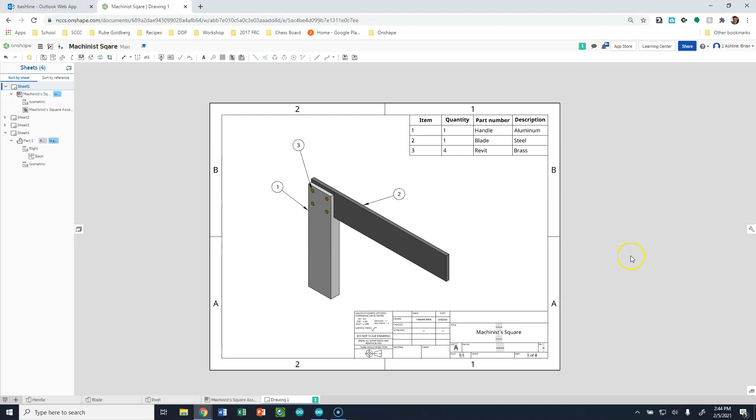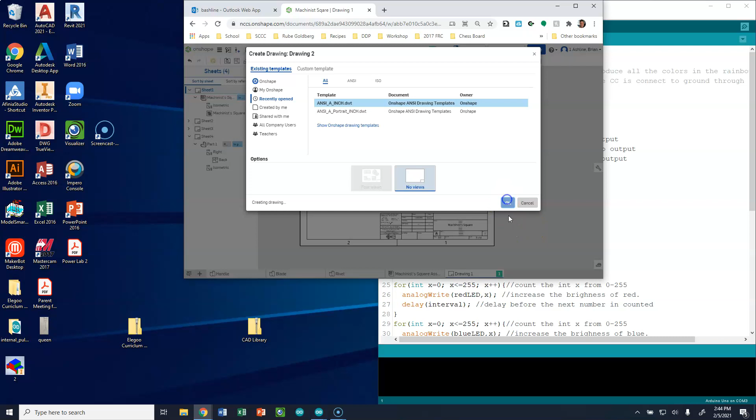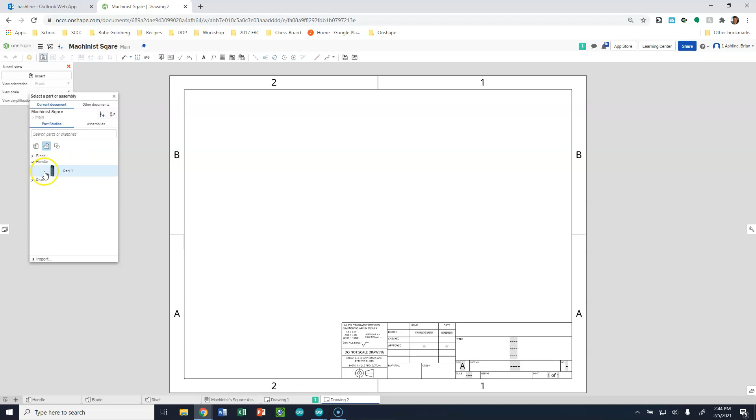Okay, so let's just work on the handle really quick. I want to show you again just a few things, and then we're going to go from there. So I'm going to bring my handle in. On my drawing, I have my handle set as 1-to-1, so that's what you guys should have it set as also.

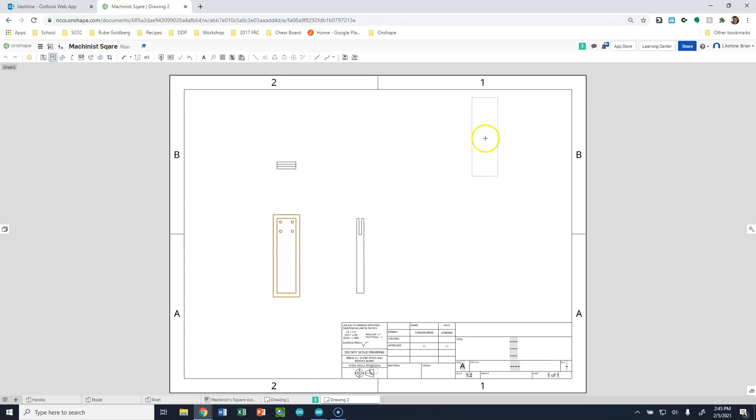So I can project that up, I can project that over, and I can project that to the side. Okay, and I don't know what happened to my 1-to-1, so I'm going to go through and edit this, change it back to 1-to-1, and boom, everything is kind of updated.

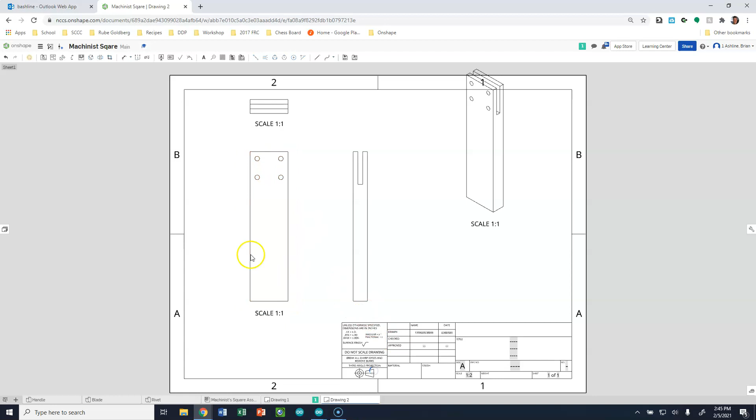And again, we don't really want these scales everywhere. Unless the scale changes, the scale should only be there once. Why does it repeat this multiple times? So let's get rid of all of that.

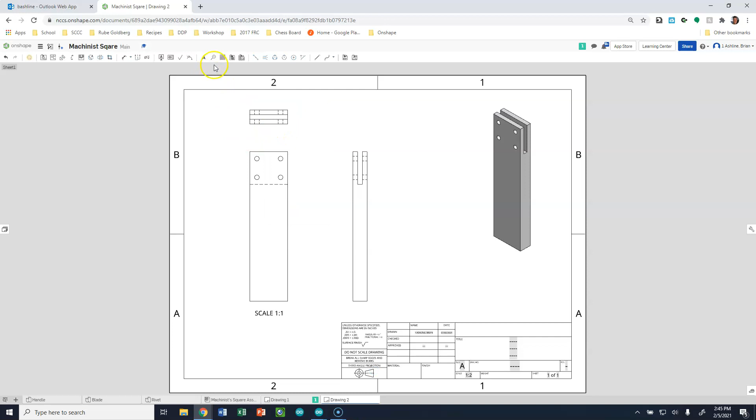So again, this is going to be shaded. Okay, and then we got to turn on hidden lines, which again you guys know how to do all this stuff. We're going to right click, show hidden lines, right click, show hidden lines, right click, show hidden lines. You guys need to go through putting in your center marks and your center lines.

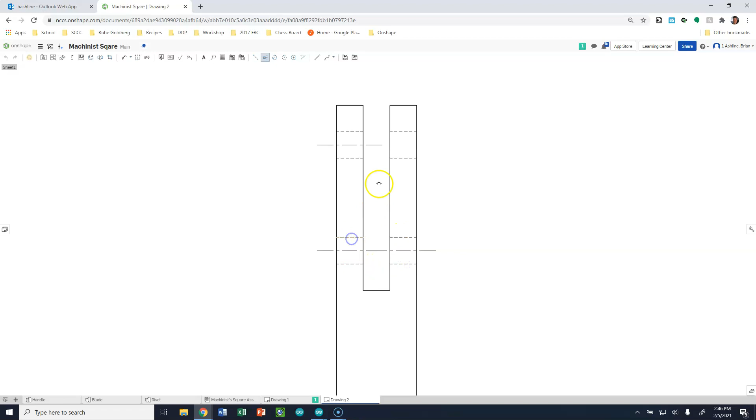All right, so again, that's all stuff that you guys know. We need to change the scale. This is actually a 1-to-1 drawing now, 1-to-1, and we're going to set up the title of this thing as the handle.

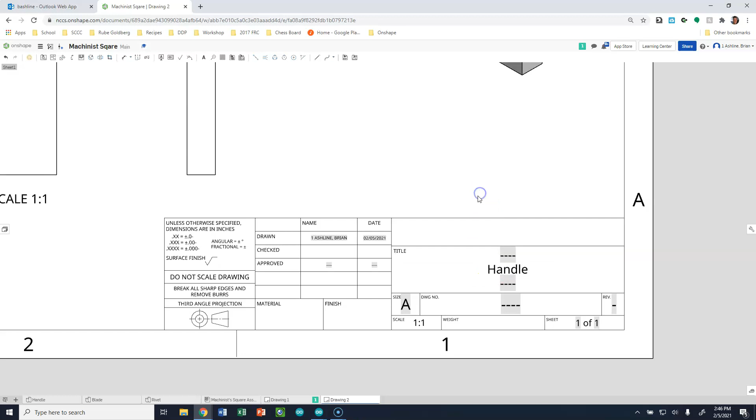Okay, so the one thing that I really needed to show you that's new is changing your dimension style. So right now our dimension style is in decimal points. And for this particular drawing, everything is labeled in fractions. So in order to change to fractions, what we need to do is click on this little drawing properties icon on the right of our screen.

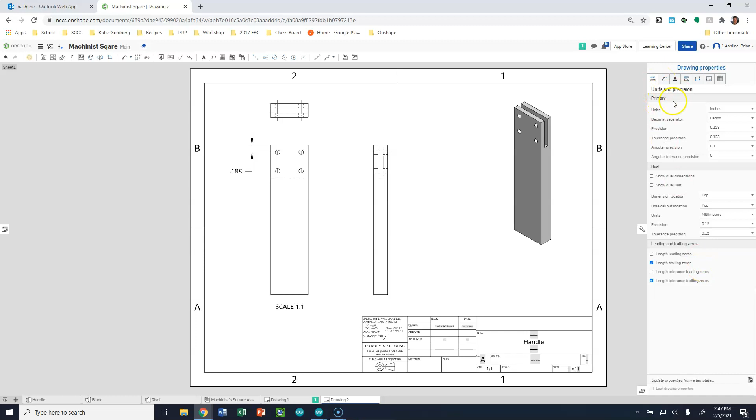And so a couple things are going to be within here. Underneath primary stuff, we have our units. Okay, we don't want just inches to be selected. We want inches fractional to be selected. Notice now that that's changed my number to a fraction.

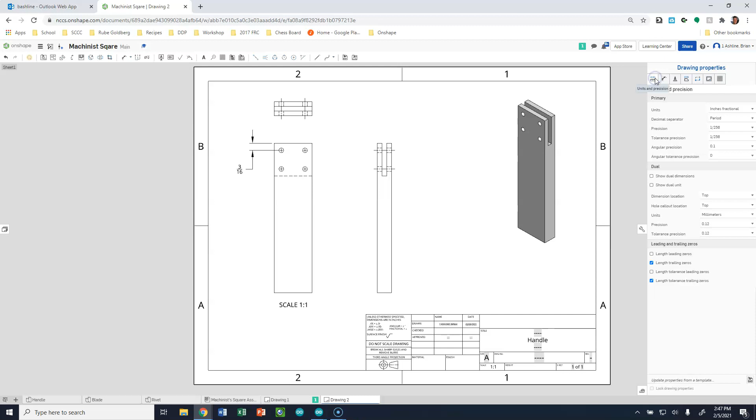All right, you might also, one thing I did too is under the dimension side, I changed my text height from being 0.12 to being 0.1. Just makes it a little bit smaller and easier to fit into things.

Yeah, I'm pretty sure that's it, right? So I went through, and again, you can kind of follow along with my drawing for right now. Dimensioned up all my pieces, got things looking good, and you got to go through those steps.

All right, but now we're going to create 2 more sheets within this drawing set, which is different than just creating 2 more drawings at the bottom tab. So over here we have sheets. This is the sheets within our drawing set. If we click this button up here, insert sheet, we can have a whole new sheet within our set.

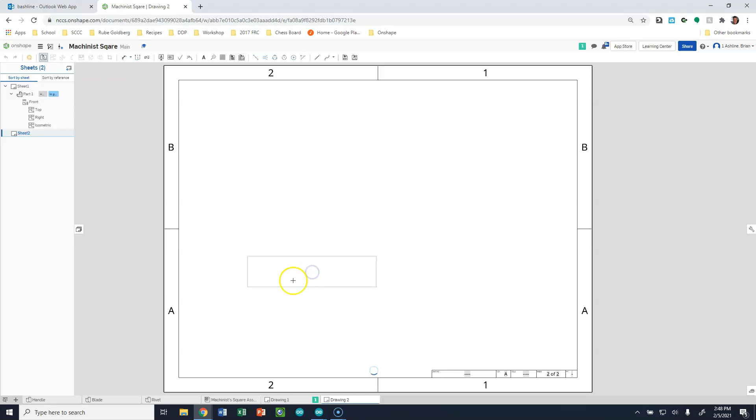And then we can go through and we can load our blade, for instance, right? And we can start putting our blade in this drawing, and we'd go through that process. And then we would create, once that's done, a new sheet, and this would be our rivet, and we would create a rivet, and then that would output that.

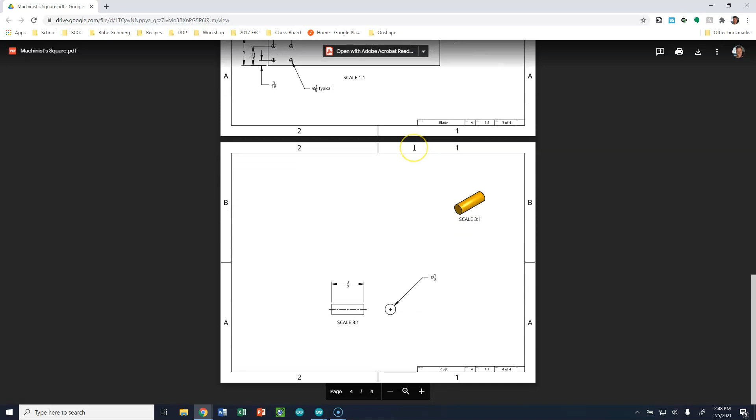And then the nice thing about this is when you go to print this, instead of it being like 3 individual PDFs, now it's just one PDF like this, okay, where it has 4 sheets, or in your case, it's going to have 3. So again, for right now, you guys are in charge of drawing these 3 objects and then dimensioning these 3 objects.

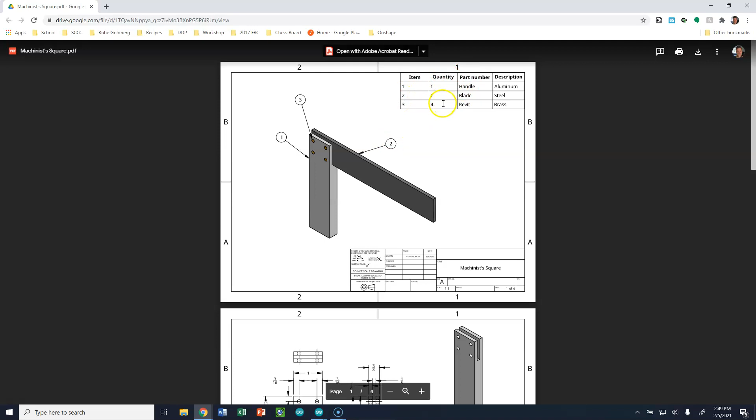Tomorrow or the next day, we're going to go over the video of how to assemble the objects, how to add things like names and descriptions to them, how to create this cover sheet with an isometric view of our drawing, and what are called part balloons, and then a bill of materials, or BOM, in the top right corner. So again, this one's still coming up, but you guys have all of the tools necessary at this point to be able to edit this stuff.

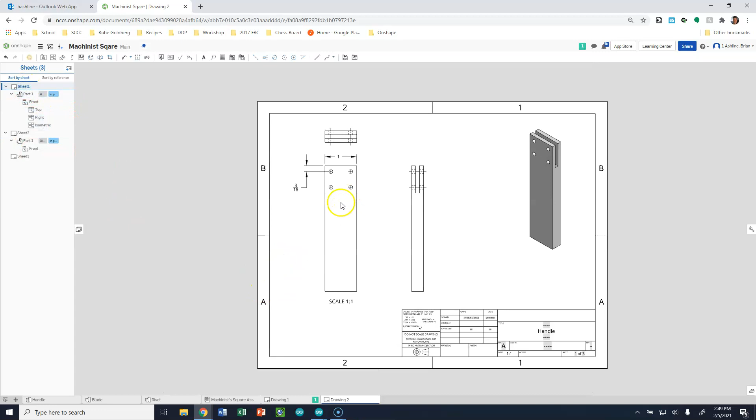I guess except for one, we did talk about this before, but I will mention it again. Let's go back to sheet 2, actually sheet 1. I started to dimension this stuff. Again, when you go to dimension these circles, everything is an 1/8 inch circle, right?

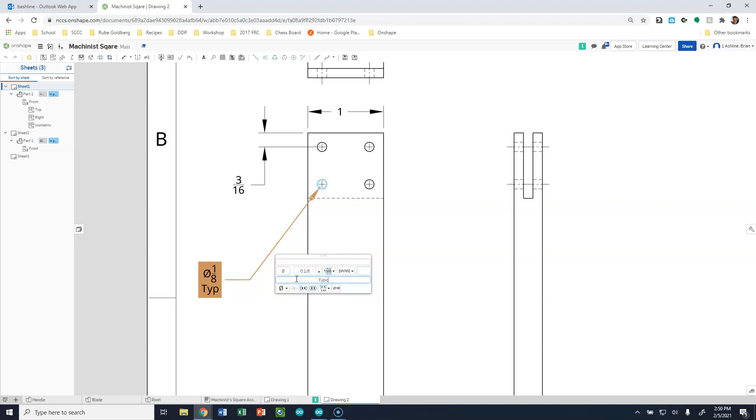So we can just say 1/8 inch. If you type up here, it's going to be above your dimension. If you type down here, it's going to be below your dimension. And if you type over here, it's going to be to the right of the dimension, right? So you can decide how you want to label your typical, because again, you don't need to dimension all 4 of these circles here. Do a typical there, do a typical for the blade as well, and then you'll be all set.

All right, so that is creating the drawings for the Machinist square. Let me know if you have any questions.